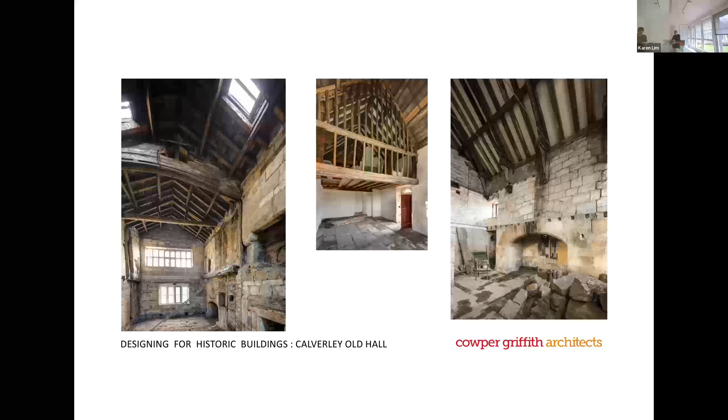In 1981, the Landmark Trust acquired the property, which had been divided into 9 tenancies. Work was carried out in the 1980s and 90s with the demolition of the 18th and 19th century cottages and outhouses to the south-east of the chapel and the northwest of the lodging block, and a small part of the property was converted into holiday accommodation.

Some parts of the building, namely the solar and the Great Hall, have been in a state of dereliction since then. At the time of the competition, it was listed within Category B in Historic England's Risk Register.

So the competition brief gave an outline history and the client's requirement for an 8 to 10 person holiday let with some form of community space. The building was to be repaired to the highest conservation standards, but the client was open to the design approach in that it could be contemporary or historicist, but wished to avoid explicit restoration.

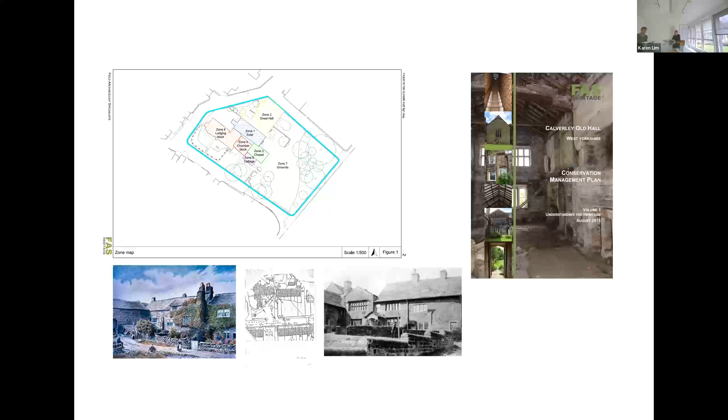So here I'm reminded of the Japanese philosophy of wabi-sabi, translated as the art of imperfection, which seeks to give old objects a new lease of life and beauty by making changes to their composition which are obvious. A good example of this technique is used for repairing ceramics, called kintsugi, and the direct translation is a golden repair.

This has been used for centuries, and in a similar way we have tried to weave our new elements into the building that will improve accessibility and support an economically sustainable future. However, a lot of our repair will hopefully go unnoticed, except for an awareness that the building is well maintained, easy to use, and pleasing to the eye.

In this presentation, we'll try to show you the process we followed, highlighting general principles for sustainability and conservation, and identifying what we've come to regard as the golden thread used to link spaces with insertions that are clearly identifiable. This has to be open to change as new discoveries are made, and you'll see that we've actually had to change quite a lot from the original design.

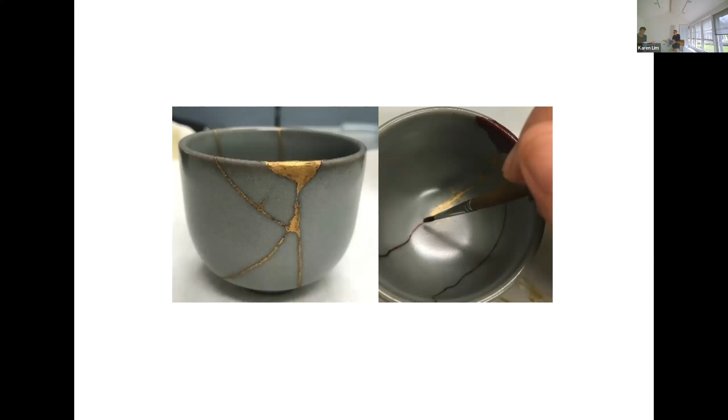It's essential to work very closely with other consultants and your clients, and then on site with your contractor and their subcontractors. The tender documents are always only part of the story because the building will reveal new challenges during the process of stripping out and repairing. When the contractor has taken possession of the site, changes need to be dealt with very quickly and efficiently in order to keep within the budget and programme. We've been very fortunate at Calverley to have been given time to carry out a lot of the opening up works ahead of the main contract.

Now we go to the site. First impression of Calverley Old Hall is that it is buffeted on all sides by residential property. In the locality, there is a consistency of ashlar masonry and stone slate roofs, but the properties that back onto the Old Hall from the southwest and northwest are 20th century rendered masonry with concrete tiles. From the outside, Calverley could be mistaken for being a range of cottages with multiple front doors, but there are intriguing references to much earlier details in the first floor south-facing window of the solar.

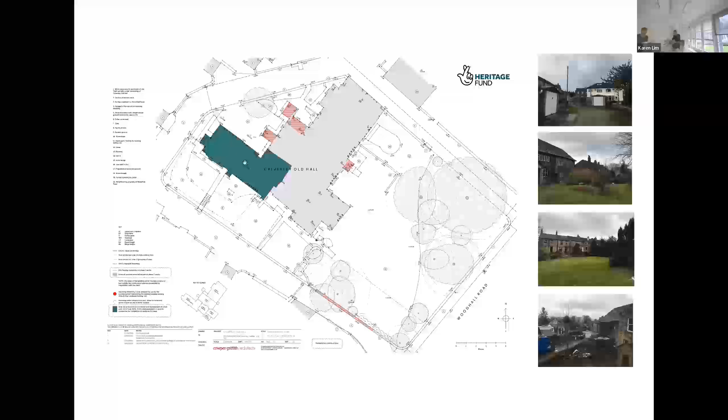Major consideration at Calverley has been to make the site accessible and sustainable. We've worked closely with our services consultants and archaeologists and clients to find ways of reducing the building's carbon footprint. This has meant improving the airtightness and breathability of the external envelope, insulating where we can, and incorporating the ground source heat pump to provide hot water and heating.

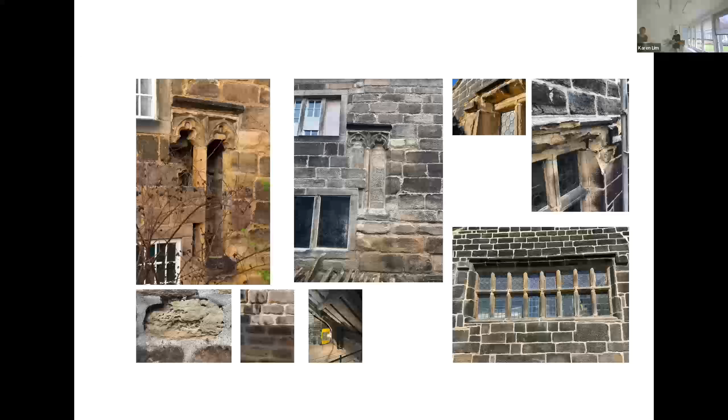So this slide just shows some of these masonry repairs. We've repointed, we've insulated the roofs where we can, we've replaced defective elements, and we've insulated the floors.

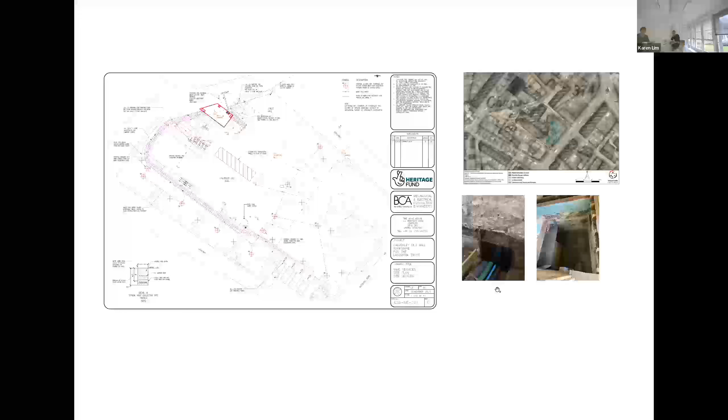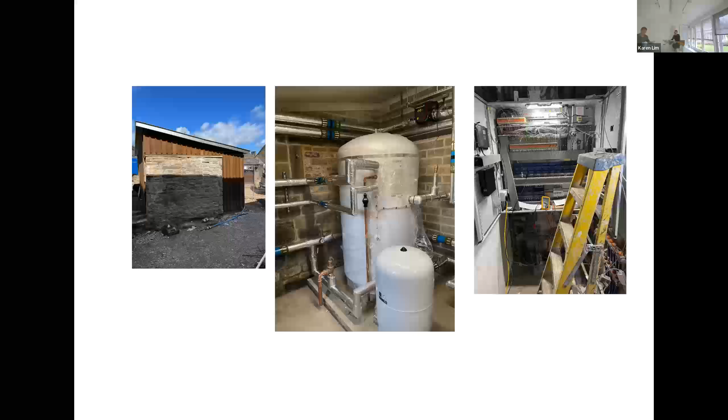So this is the plant room. One of the drawbacks of the ground source heat pump is that you have to store the energy, and you can see that we've got a huge water tank there, which would have been really heavy. So that was one of the reasons why we decided to put everything into an external plant room.

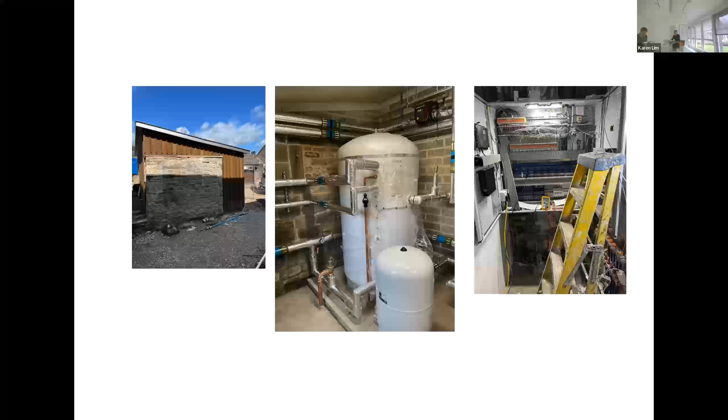We've also introduced photovoltaic panels on a south-facing roof pitch, and where possible we've exploited natural light and ventilation within the building. Real effort has been made to reuse materials from the site and to source new ones from the locality.

There are two parking areas. One is accessed from the main road, from which a pathway leads to the southern doorway of what was once a cross passage. The second area is to the north of the site, and the accessible parking bay provides access to the northern door of the cross passage.

The paths follow the site's contours to avoid ramps and handrails, which would have made the approach institutional. The path will be lit with little ground-level solar lights, and the landscaping will remain very natural, but there will be new hedging to provide screening.

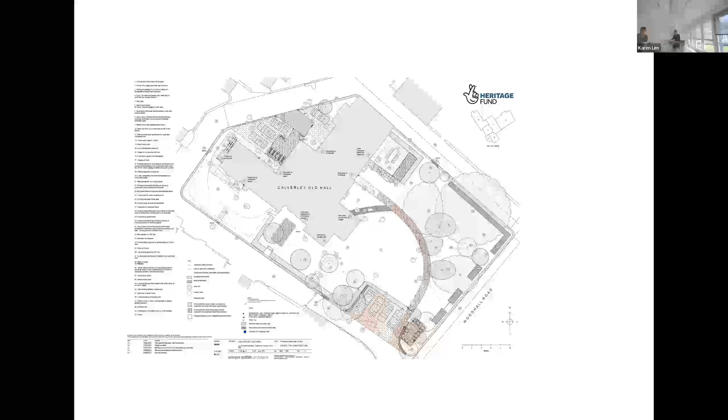Now we look at the interiors. At the time of the competition, the lodging block was the most complete of the interiors. It was heavily beamed with a large stone fireplace and a flagstone floor, and it was being let as a holiday apartment.

The first impression of the remainder was of a series of cellular spaces, most of which had been decorated with a wide range of wallpapers, overboarded floors, and floors inserted to make practical use of very large volumes. The spear truss was partially visible within the first floor bedrooms, but the most exciting view was to be found by crawling through a small loft hatch.

The Great Hall and solar had both been derelict since the 1980s and were the reason for the manor being on Historic England's building risk register. These had been stripped out in the 1980s and were the easiest to interpret.

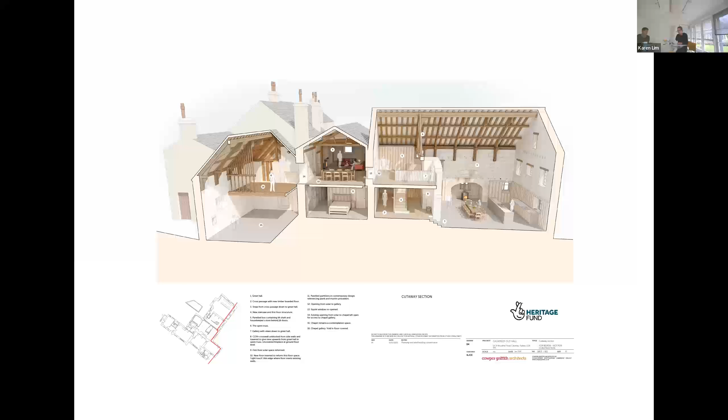Sometimes the date selected relates not only to the building but the wider context. So for instance at Stowe, for the National Trust, we would conserve the parklands to a date in the late 18th century. It was important that the new inn related to this. The date selected needs to consider the extent of fabric belonging to later periods too.

This is a picture of Stowe, the new inn. We were very fortunate because we had a sketch by Claude Nattes, and that helped us put back features that had been removed when we started to repair. But this happens on small projects and large projects.

At the David Parr House in Cambridge, the house had been decorated by David Parr in the 19th century, but had been lived in by two generations of his descendants, the last inhabitant being his granddaughter, who resided there until she was in her 90s. It was decided that to strip the interiors back to the last of David's decorations would have been to lose two rooms that had had a change of use, and these changes were an important part of social history in themselves, so the decision was made to keep them.

So each project, I suppose, has to be considered, and it's always very hard to know what should be removed and what should be retained. I'm going to show you now the competition scheme, and you'll be able to see as we progress how it has changed as we have gained more knowledge.

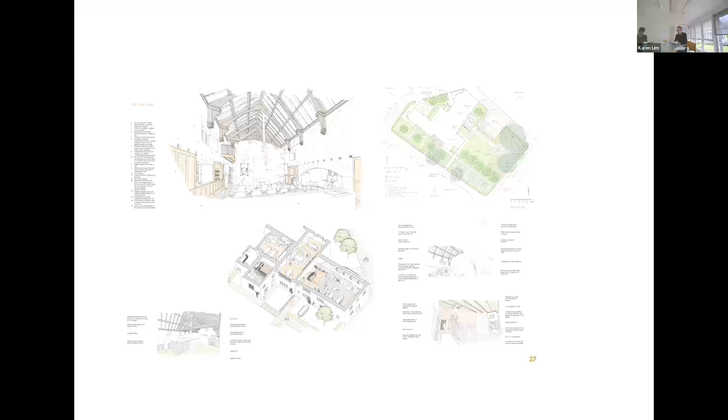A condition survey is always a good starting point for really getting to understand the building, because it forces you to focus on the materials. You can see what has weathered well, what should be altered for the long-term good of the building, and what is in very poor condition and beyond repair. This can provide opportunities for altering the design or infilling the voids.

The opening-up work was carried out in consultation with the conservation officer and our archaeologist.

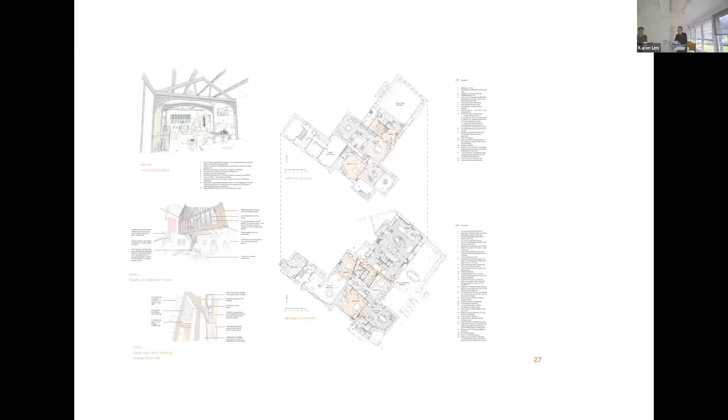If we look at the roof, for instance, it became clear that repairing the roof was critical for the conservation of the interiors, and we were very fortunate to be able to carry out the re-roofing work ahead of the main contract with a grant from Historic England.

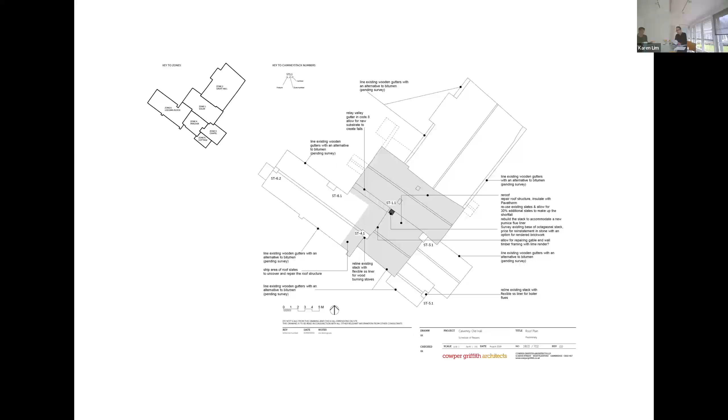This slide shows the roof that we found, and you'll see that it has a very narrow valley gutter. Later on, the slide will show you the condition of the fabric directly below that, and how by widening it and including trace heating, we could alleviate some of the problems.

The hatched areas show the areas that we re-roofed and could insulate to a good standard. In Zone 2, we insulated the Great Hall roof on the underside without insulating further.

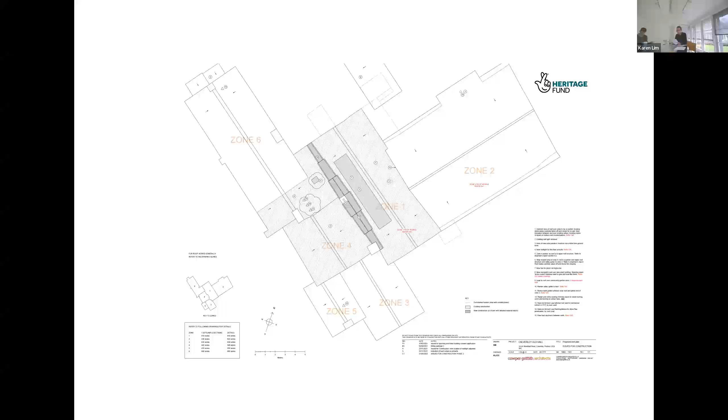Calverley had been partly re-roofed in the 1980s, but the solar and parlour block roofs were in a poor state of repair. There was a valley gutter running between the solar and parlour block, which is long and difficult to access. We made this wider in our re-roofing design and installed trace heating.

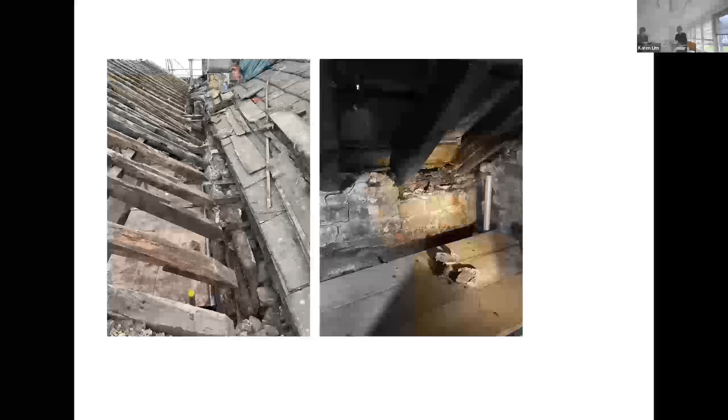The south-facing pitch of the solar is completely concealed from view at ground floor level. We recognised an opportunity to install PV panels here, and there was also an opportunity to install breathable insulation and provide a degree of airtightness to the roofs. This slide shows what we found when we took the lead work up.

We had quite a lot of replacement in this area, and we discovered that the roof members were reused, probably from an 18th century timber framed building. So things are not always what you expect.

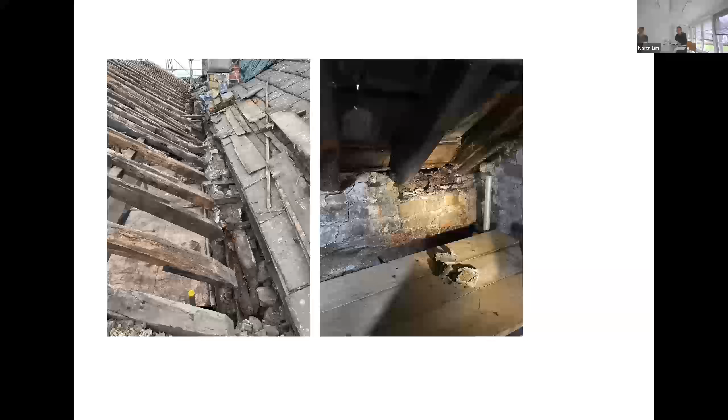The roof line has no original chimney stacks at Calverley, which is partly why the building looks like a series of cottages. However, buried within a void, there is the octagonal base of one of the original stacks. You can see that on the bottom right-hand side.

Our philosophy at Calverley was to keep the memory of the later phases in the external appearance of the building: the fenestration, the chimney stacks, the multiple front doors. At Calverley, one of the stacks had been rendered and we discovered it was in very poor condition. This was rebuilt in stone using materials reclaimed from two porches that had been taken down.

The construction phase of the re-roofing work at Calverley was very interesting. The solar roof members, as I said, were reused, but you can see the stubs of the original rafters on the top right-hand slide, much steeper pitch and much larger, and oak. So you can see the changes and get an idea of what that part of the building might have looked like.

Also very interesting was the number of objects that were buried next to the fireplace. It was the number of objects that was really unusual, because apotropaic objects in buildings are not unusual in themselves, but just the quantity, and the number of children's shoes and toys. You can see the little shoe that was pulled out of the rubble, and then the way it was catalogued later by the archaeologists.

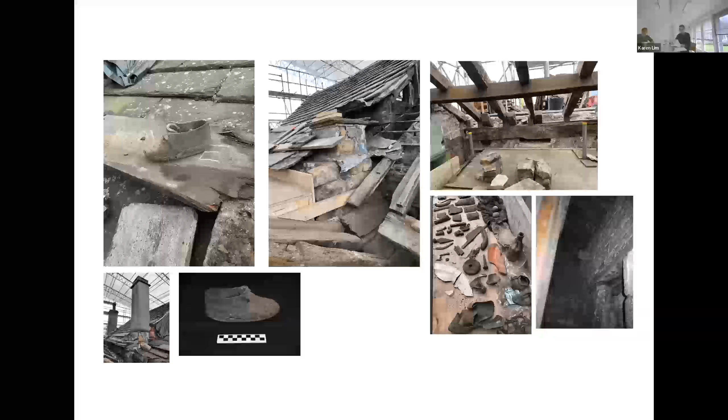During the construction phase, we inspected the stacks and found that they needed to be taken down to tile level and rebuilt. The decision was taken to seek approval for reinstating them in handmade bricks to the original form. So there, it's a different approach for a different client and different building.

So then we move on to the interiors at Calverley and the cross passage. Accessibility was a key consideration. We were fortunate at Calverley that we didn't have any original ground floors deemed too precious to be lifted. The design needed to find a floor level that best suited each space whilst connecting to the adjacent spaces. Once we'd agreed on a strategy, we needed to test it with a number of trial holes to check the depth of the footings to walls. We didn't want to impose a level that would require underpinning unless absolutely necessary.

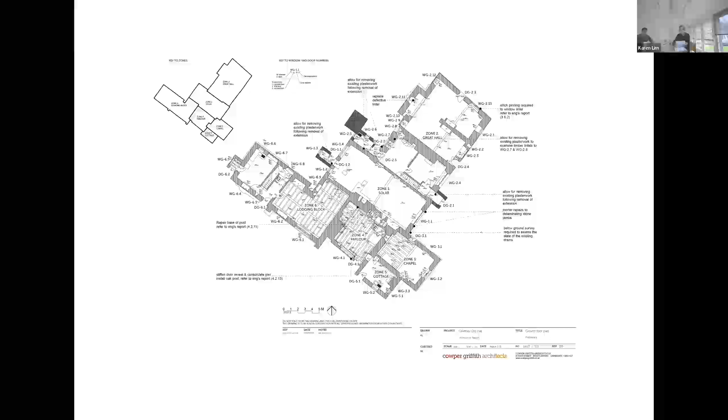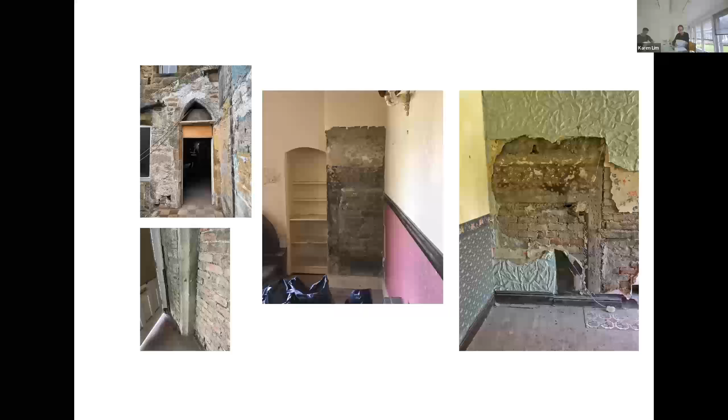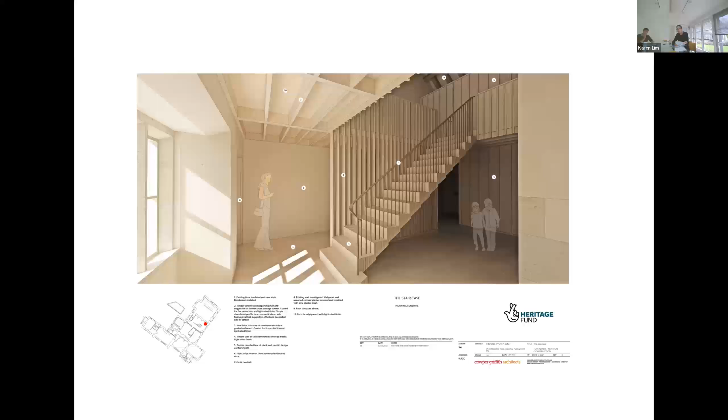The other bathroom you have to go up 2 steps to reach, because it's actually built over the top of a vaulted cellar. The cellar runs below the solar and the lodging block, so immediately you begin to see that this building has had a change of shape.

Then the aesthetics of the staircase and cross passage. This was a design feature, and we felt it needed to be of our time with an economy of materials, but with references to the past. We wanted it to be freestanding so the cross passage was kept clear.

The design changed significantly when we found the 17th century cross wall. Our design was based on very primitive staircases, which were a series of logs stacked upon each other, and the development of the cantilever stair, which relied on interlocking elements to provide stability.

The cross-laminated sections are expressed at the 3 ends of the staircase so there is a truthfulness to materials. Cross-laminated sections are a more sustainable way of using wood, relying on small section sizes.

In this image, you can just about see the lift behind panelling. And the panelling in this area, because it's circulation space and not the Great Hall, we decided it should be birch-faced plywood with softwood trimmings.

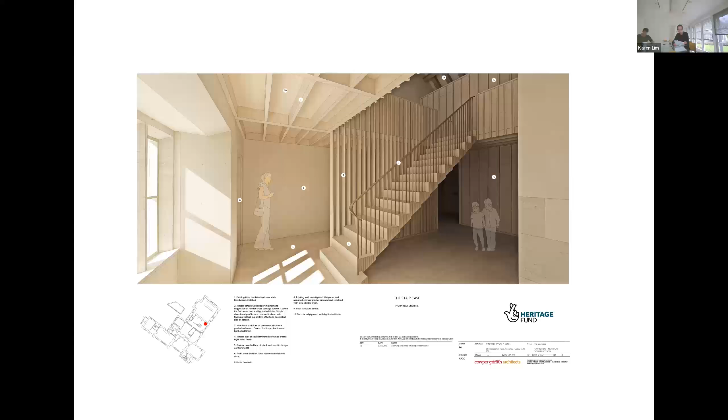At Heckington Windmill, accessibility had always been an issue. The Grade 1 listed windmill had small doors and windows, and the mill had a series of raised platforms with ladder-type access.

At Calverley, the new lift and staircase provide access to a first floor sitting room located in the solar, and beyond that there is access to the chapel, painted chamber and lodging block, which you'll see on the next slide, which is the first floor plan.

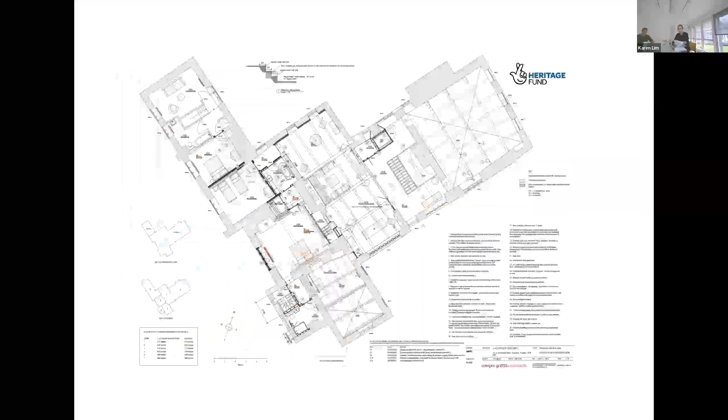Here we can see you come up either the staircase or the lift. You can look down into the Great Hall, or you can go into the solar. Then you go up some steps into the painted chamber, which we'll talk about a bit later. There's also access into the chapel from the solar.

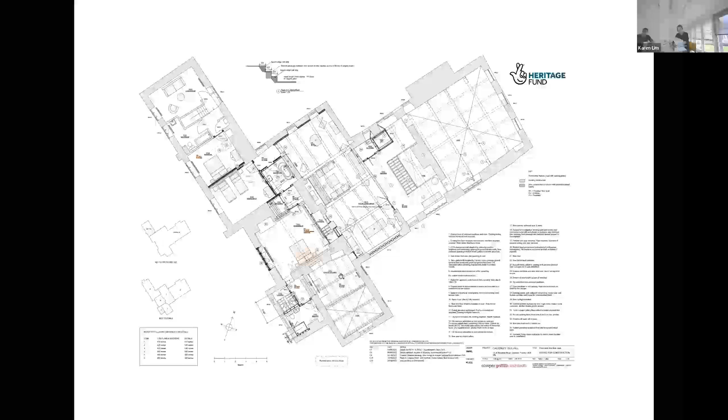The challenge posed by the Great Hall was to integrate services and provide an acceptable level of comfort without compromising the historic features. The introduction of panelling was a way of providing a services route that didn't affect the stone. We imagined it being like a beautiful cabinet, so the shutters are in line with the panelling and a continuation of the walls rather than stepping in and out with the later door and window openings.

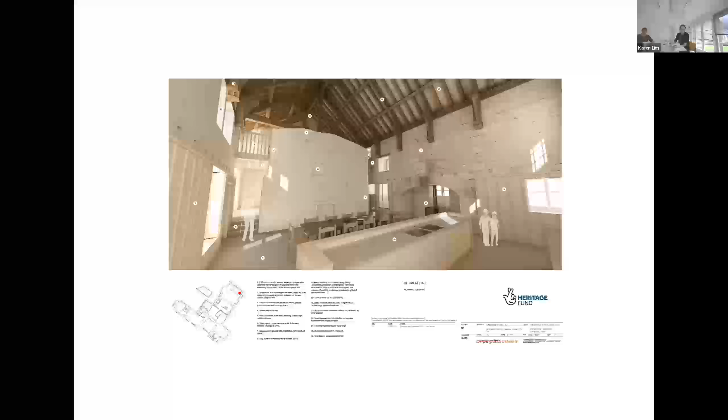We were able to add breathable insulation to the walls, and we used WUFI modelling to ensure we didn't adversely affect the fabric by changing its dew point. We found historic panelling stacked in the solar, so there was precedent for panelling in the building, but our panelling is oak-faced plywood with oak muntins and rails.

The flagstone floor was numbered and photographed and then carefully lifted, so we could install an insulated limecrete floor with underfloor heating. We relaid the paving, and where we had taken down the walls and had no paving, we put smaller sections of stone infill so you could still read the former layout. This is an image that looks back towards the spere truss.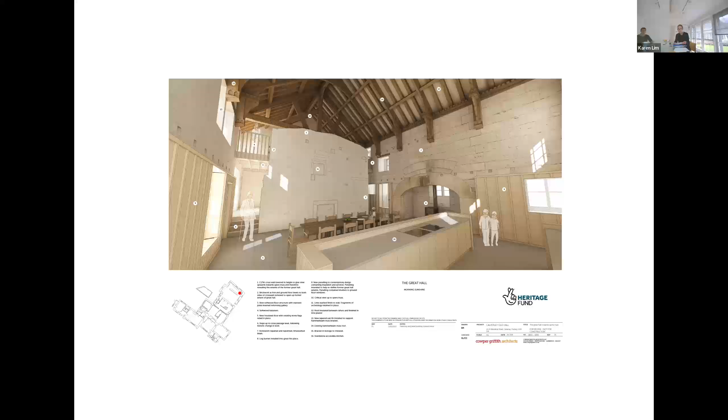We've inserted a kitchen at one end of the Great Hall, and we can look up towards the gallery area over the cross passage.

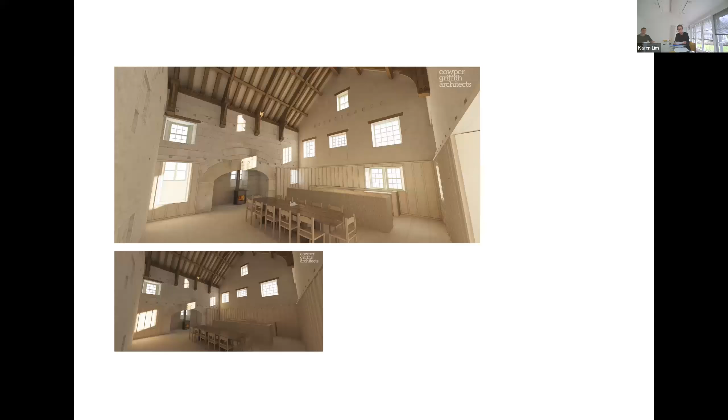This is an image of the shutters closed and open in the Great Hall, and we've got a wood burning stove in the fireplace.

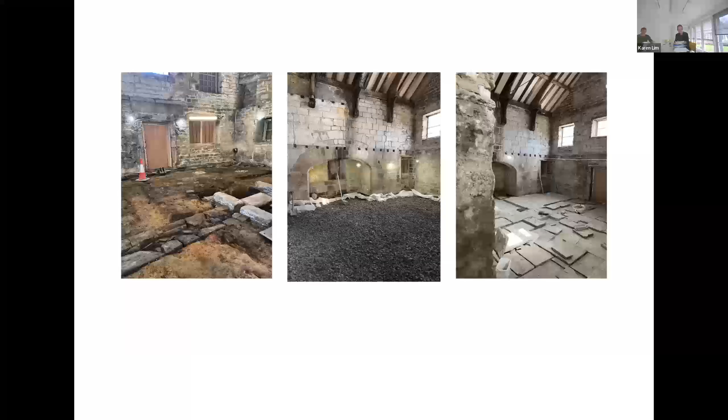And this is how we achieved that image. So we've taken up the floor here, we've put in our breathable limecrete floor, and we've started to relay the paving on the right-hand side.

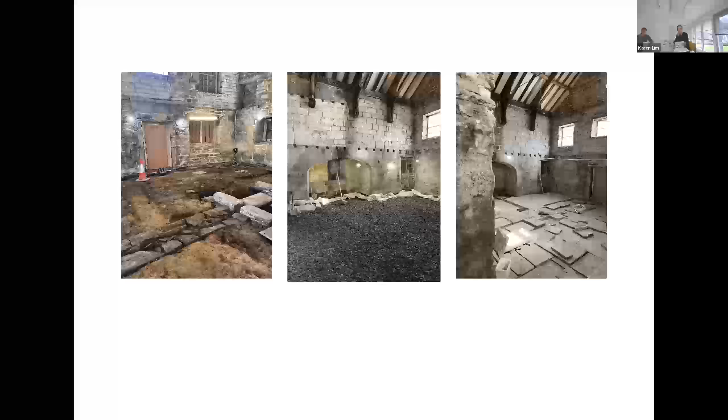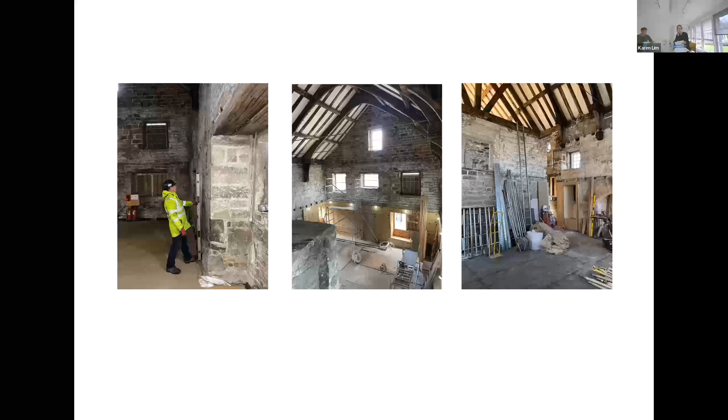Then we move on to the solar. We spent a lot of time on this element trying to find a solution for flooring the solar.

We worked very closely with the Morton Partnership to create a floor that would be as slender as possible and float off the walls. It needed to be a structure that could accommodate services. The historic walls were to remain unplastered, so electric cabling and plumbing, ductwork and the bathroom extracts all needed to be distributed through the ground and first floors. We felt it needed to be designed so that you could still appreciate the sawn-off floor joists of an earlier phase. You can see them just sticking out of the wall there on the left-hand side.

Spans are reduced by the insertion of some very slim steel posts that were concealed within our studwork walls. There is a perimeter steel channel that allows the wooden joisted floor to be isolated from the historic walls, except in a few areas where steelwork connects to the masonry. Deciding on the exact location of the connecting points involved discussions with the archaeologists.

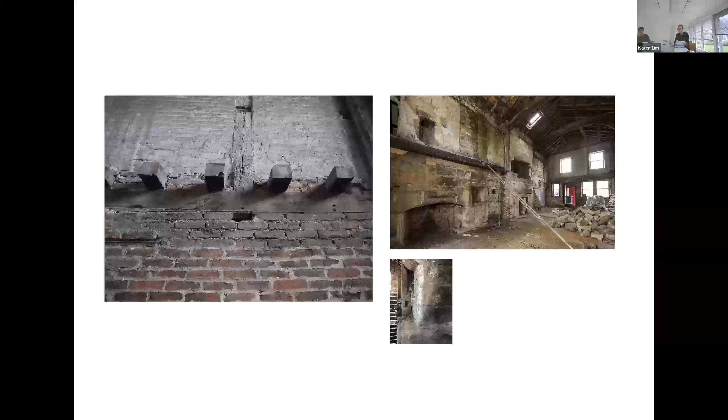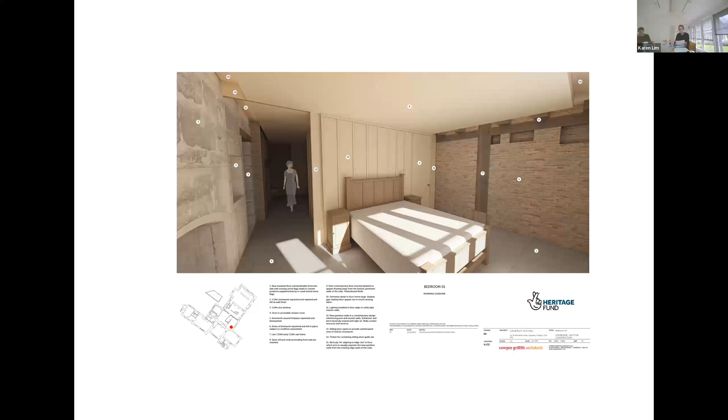The bathrooms are very neutral, but the small, highly reflective tiles catch the light and offset the chalky nature of lime-washed walls. Bob Costello Associates helped create a mechanical extract system that linked the two ground floor bathrooms to a single unit. This minimised ductwork within the floor zone, and the waste air from both areas will be extracted via a slot in the replacement door frame of one of the disused external doors.

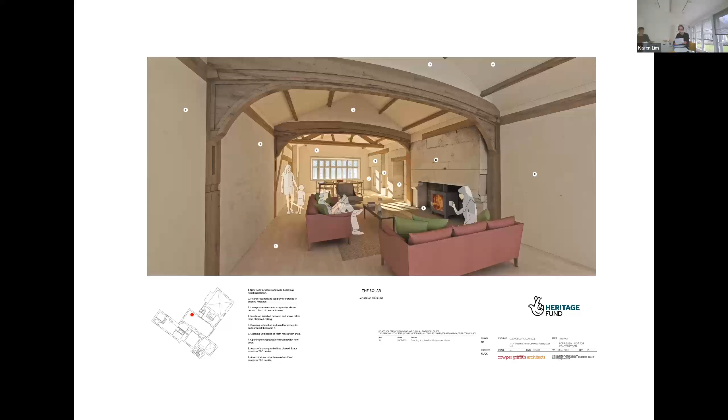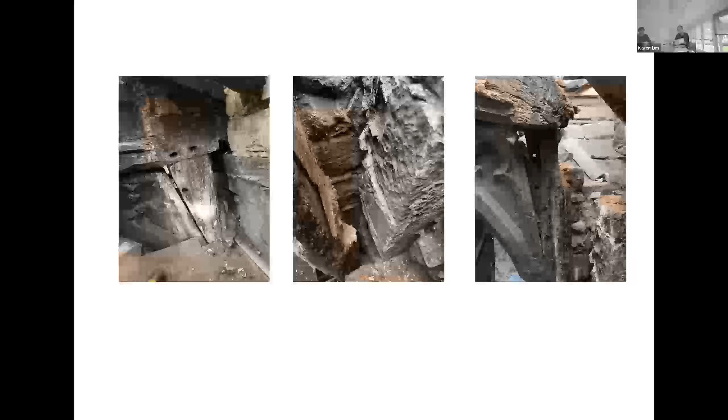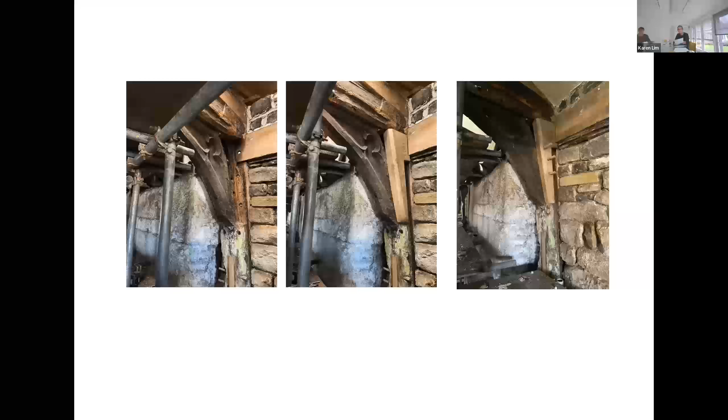And this is the repair. The middle slide shows a remnant of the orphan door in the corner of the timber frame, and that's being conserved. Then you can see the galleting in tile in brickwork on the top right-hand side, and the galleting in stone where we're infilling areas in ashlar masonry.

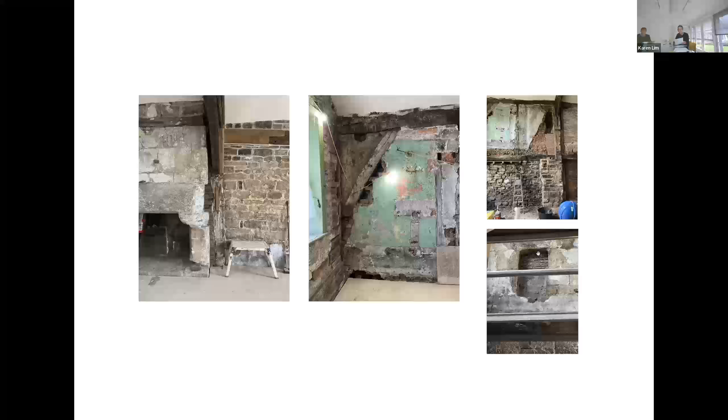So the painted chamber - this was a very exciting find. The painted scheme had been protected by a wall lining of lath and plaster and softwood studs. The wall finishes and small tiled fireplace are thought to have been installed in the 1930s. The room may well have been panelled before that, but we have no conclusive evidence of this.

Cuts in the skirting suggested that there had been a larger fireplace, and we carried out some opening up works during the early design stage to determine the size of this. The floor had been overboarded and was completely flat.

The lath and plaster ceiling was deformed because there had been problems with the roof structure, resulting in movement to the external wall and cracks at the junction of the ceiling. This meant that the re-roofing work became a priority, and fortunately, by the time we were in a position to remove areas of the lath and plaster, we had a weathertight external envelope.

The roof had been insulated and reslated, the external walls had been repointed, the chimney stack had been capped, and Lincoln University's Conservation Department had set up a system of remote monitoring so that electric heaters could be used to regulate the humidity.

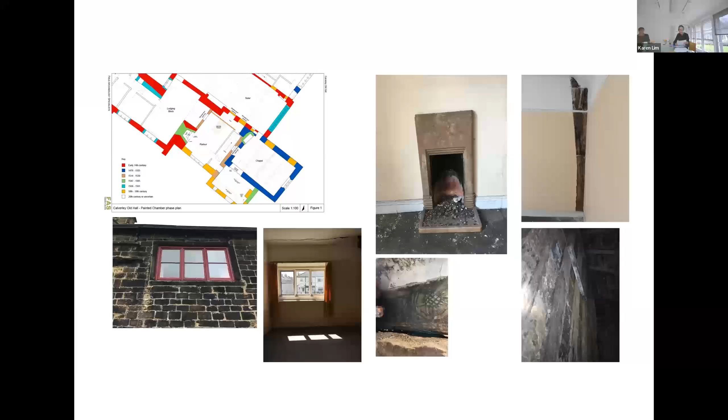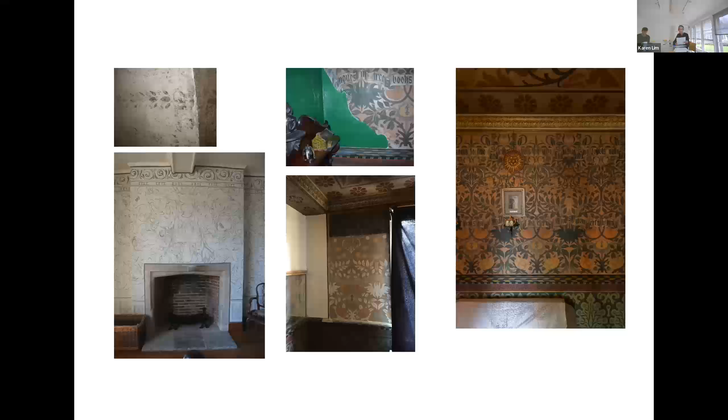So there were different options, but the option that we've moved towards with Calverley, after Opus carried out their condition survey, they discovered that actually the pigments were quite stable in natural light, and the substrate could be conserved.

So here, the scheme is going to be left exposed. We are going to make sure that we have a very controlled environment. So we're drawing air in from the solar up through a fan.

And then the air comes in through the new door case, through a slot in the door case, and into the room, and then air is drawn up through the grille in the ceiling. So this will help to achieve the optimum level of air changes per hour.

We have insulated the external wall. We have permission to replace the window and reinstate the stone mullions. And we've proposed an external oak louver to filter any sunlight. And we've got inward opening bronze casements, but they will be closed to visitors, and inward opening just for the purposes of cleaning.

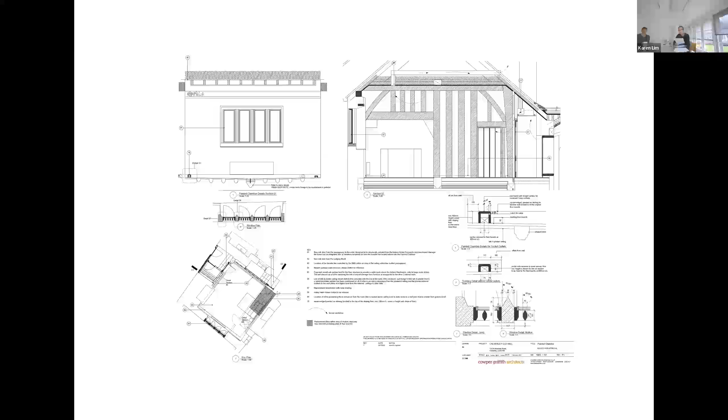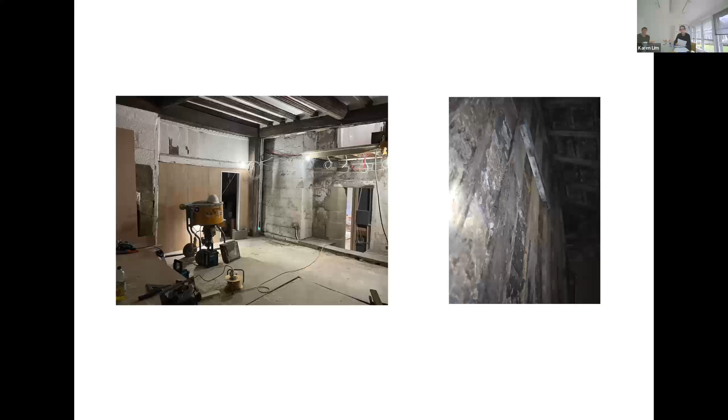Where it connected to the external wall, it had deteriorated - it had obviously been very wet. So on the next slide, you can see that we had to repair that so that we could conserve the floor of the painted chamber, which was of the same period as the painted scheme. The next slide shows what we did there.

So over to you, Hannah.